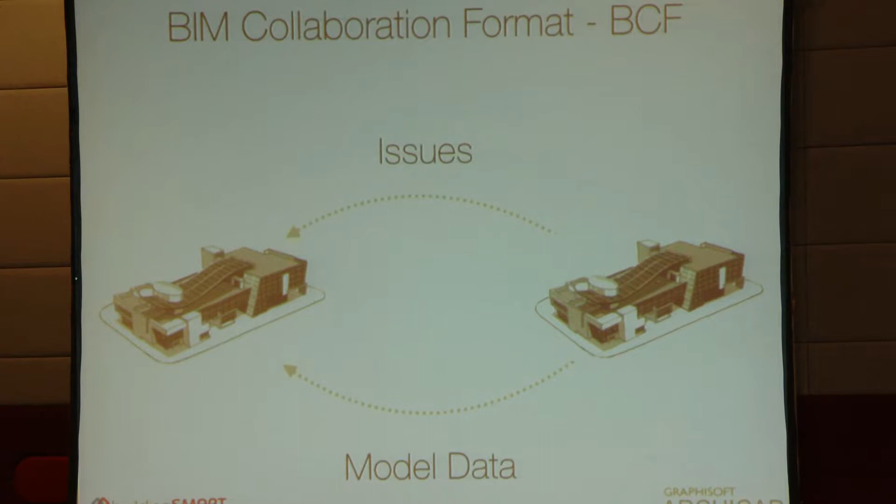So the point of this kind of communication is that the model transfer and the transfer of different issues identified in the project are separated from each other. This means we don't have to send the model information with each and every issue we've identified - we send the model only once, and we record issues one by one and send them separately.

This way, the file size of the issues can be reduced to simple kilobytes, so that the data transfer on the internet is reduced, and the XML scheme is very easy to read by any kind of software. You'll see in the end what software is compatible with BCF.

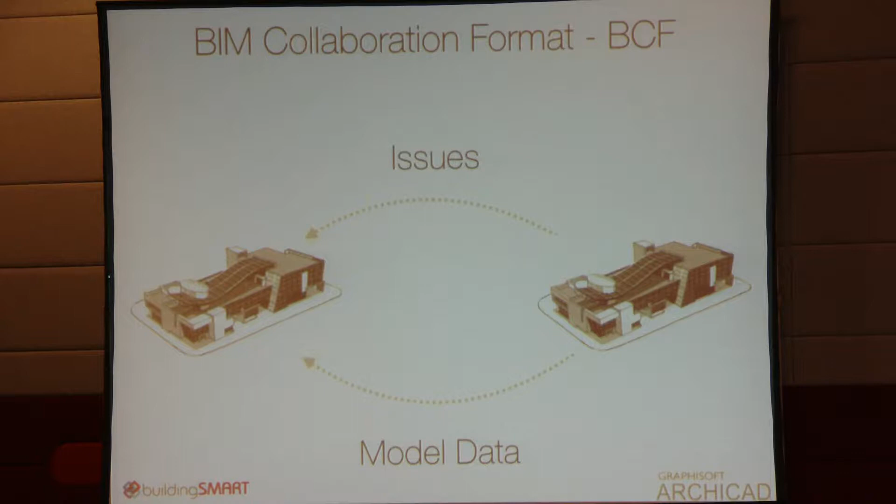So I'll show you an example. I'm going to use ArchiCAD and Tekla BIMsight to show you how we can communicate these issues with each other. First you have to identify the issue - you can do it manually by highlighting certain elements, or use some automatic process like clash detection between MEP and structural elements.

As you can see, the elements are highlighted with orange color. One of them, the horizontal one, is a structural beam right below the slab, and the other one, going from left to right, is an MEP element. So it's a collision, which was automatically identified by ArchiCAD.

Now we have an entry already. This issue contains the information about the element, the person who created this issue, and the date. It also contains the 3D cut view, which is the position of the camera and the 3D cutting planes.

What you see on the bottom right corner of the screen is actually not a screenshot. It's a 3D view that we can restore in any other BIM software which is reading the BCF file. Then we input some comments, we input the category as well, and we can save it as a BCF.

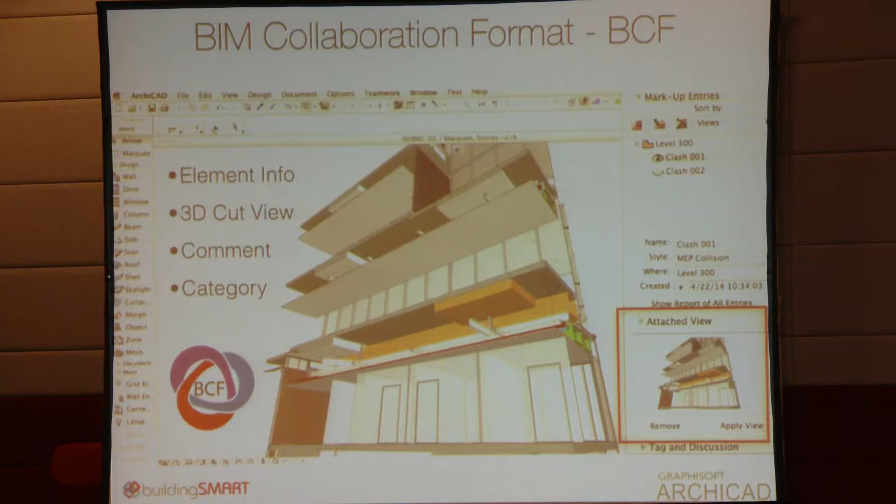The second step of the communication is transferring the model between different BIM softwares. If you're not using the same BIM software, you can use an open standard like an IFC file format. In this picture you see the main IFC file and an MEP file, both imported into Tekla BIMsight. Tekla BIMsight is free of charge, anyone can download it, so you can communicate with anyone who has access to a computer.

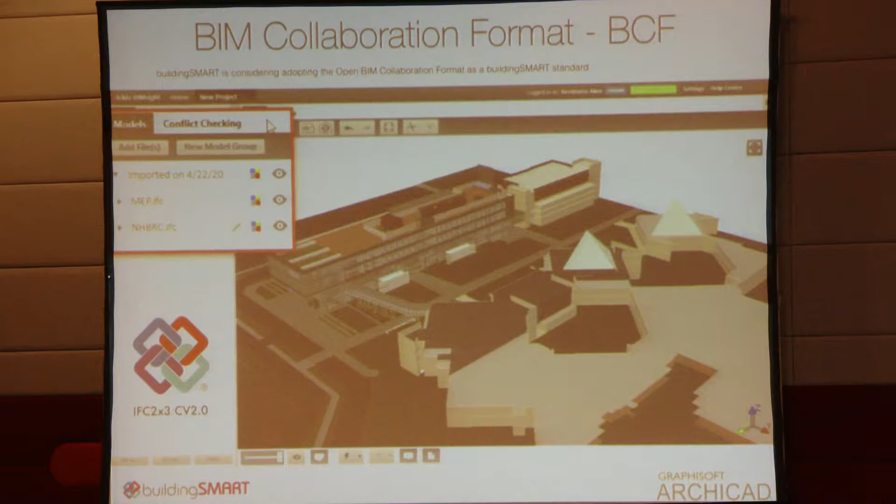When importing the BCF file, which was recorded in ArchiCAD, we can see the same kind of information. The 3D view has been restored, the 3D cut planes are there, so you can actually locate your issue in any kind of model, regardless of the size and complexity.

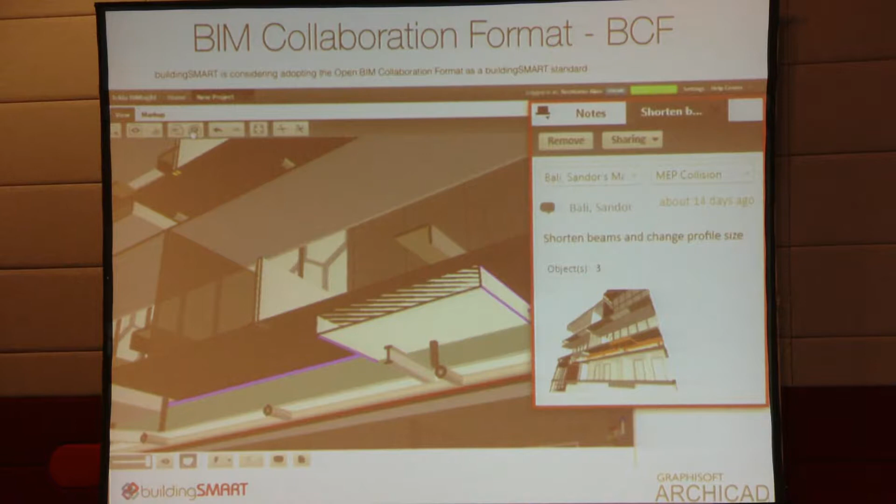You see the information there: the 3D snapshot, the 3 objects highlighted with purple lines, the name of the person who created the comment, and also the comment is there.

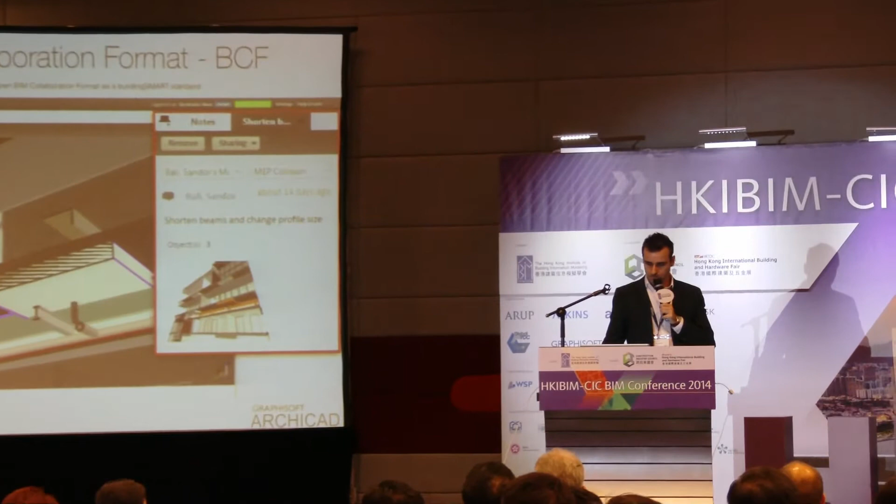So what we have to do is create our answer. It's also going to be a BCF file. We highlight the element, it's the structural beam. You can see the instructions there: shorten beams and assign a certain profile, name of the person, 3D snapshot, all included, and save it as a BCF file and send it back to the original software.

Now you can see that the same kind of 3D view was restored. 3D cut planes are cutting the model, so you can easily identify this issue within the model.

So this is a truly open standard that will hopefully transform the way we communicate issues among project stakeholders. Many of the popular BIM applications have already adopted using it. The original developers wish to transfer the ownership and rights of the BCF scheme to buildingSMART for adoption as an open standard and maintaining it for the benefit of the industry.

The second thing I'd like to talk about is collaboration. In order to understand that, and in order to understand the case studies that I'm about to show, I have to talk a few words about the technology being used. For that, I'd like to begin with the teamwork concept.

In a very short definition, teamwork is how we manipulate the model in the cloud or just on a local area network. It offers a real-time collaboration environment with prompt updates about the BIM model, so every participant can work on the latest version of the project. It's just like you're sitting next to each other, although you may be sitting in different countries.

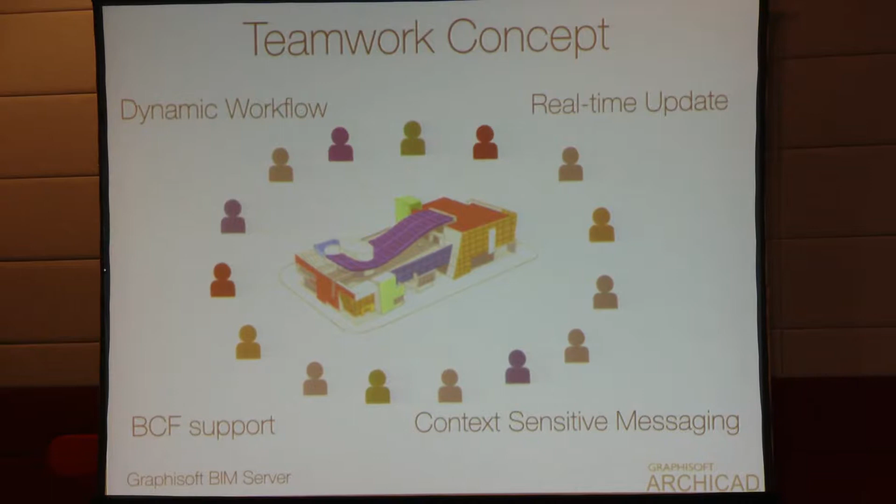It's based on a dynamic workflow where users can reserve, release, or request elements from each other. Once an element is reserved by someone, it cannot be modified by any other user until it's released or requested by someone else. This kind of workflow is supported by a context-sensitive messaging system where users can include element information and location with the request and the messages. Teamwork also supports BCF files, so it facilitates an open communication workflow with any stakeholder in the project.

Based on the real-time collaboration concept of teamwork, the Graphisoft BIM Cloud is connecting teams and projects of any size or setup using a very simple HTTP protocol, accessible from computers or even mobile devices. It can scale up to any size of project and any size of team or any number of companies.

It can comply with stringent security measures with its very flexible access management system, and it's fully integrated with the company's Active Directory user database. So you can just ask your IT manager to import all your users, and you can use the same login, the same password for accessing the BIM Cloud.

So this is not a service that is provided by Graphisoft. We just give the software package that can be used in many ways.

It consists of three main parts: the BIM Cloud Manager, which is responsible for managing the users, the projects, project location, the access rights, the libraries; the BIM Cloud servers, these are the ones that are hosting the BIM data, and when you're working on the files, this is where basically the computational task of manipulating the model is done; and the third is client access licenses.

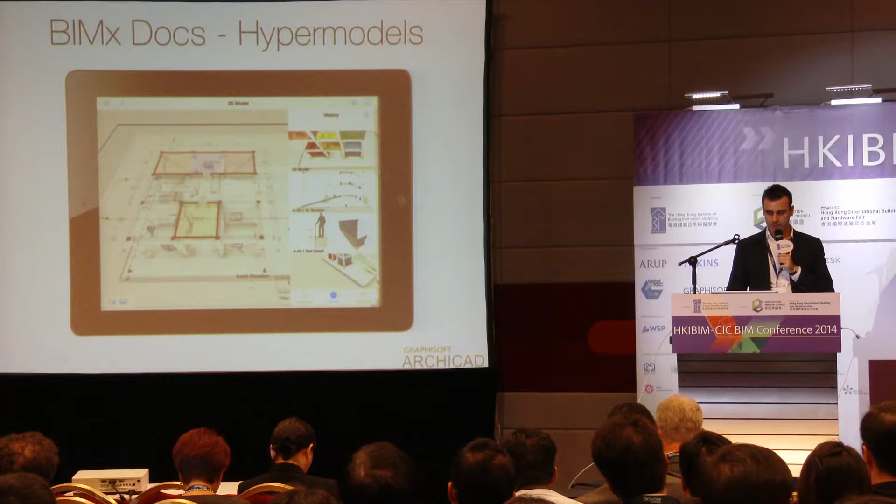You may have guessed, when I was introducing some trends about the BIM industry, that my case studies are going to come from Japan. I have two studies, one from Kajima Corporation and the other from Obayashi Corporation. These slides are presented by Kajima, so I'm going to show them as they were.

In 2013, Kajima implemented a cloud platform for collaboration to manage the expanding number of BIM projects. This was called Global BIM, and I will explain the evolution of this technology and the conclusions they have found.

Kajima started its business 170 years ago and has its headquarters in Tokyo, Japan. Now it has grown into a company of 15,000 employees worldwide with an annual turnover of $15 billion US. There are many offices all over the world.

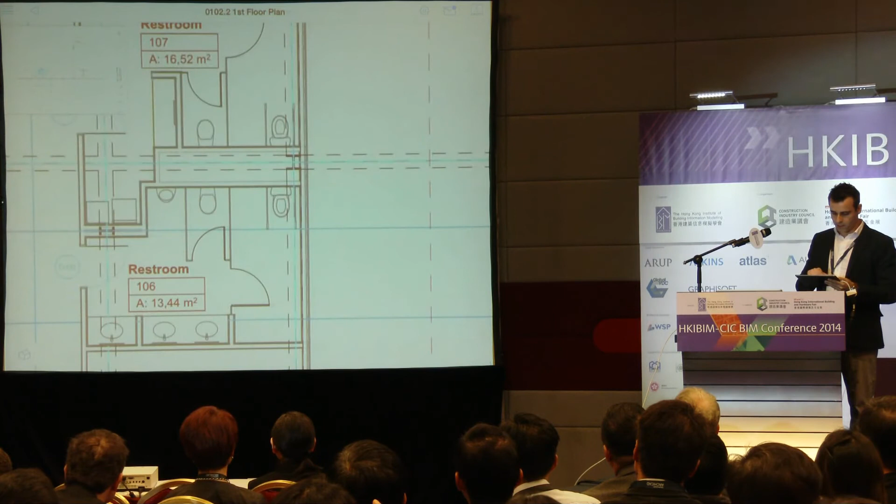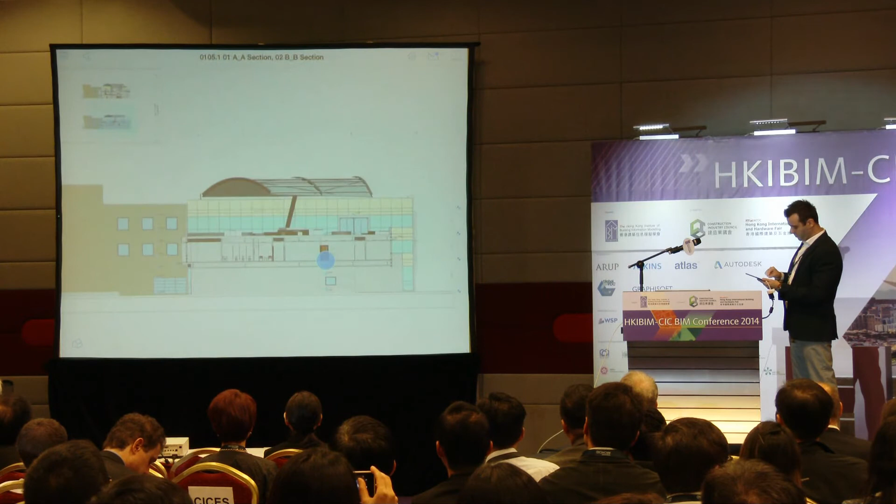And you can see that this is a very high quality drawing. These hyperlinks are all across the project. It's not very visible, but if I zoom in you may see these blue markers. For example, this is a section view. You can jump to the section view and also view it in 3D.

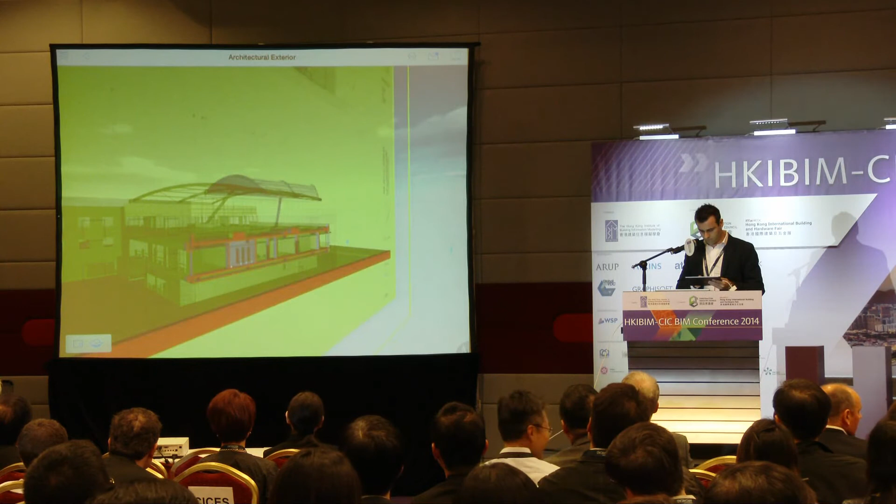So now I can move the section independently, or I can decide to move the cut plane to create new sections. So at the same time, it's a way to combine the 2D documents and the 3D model, or you can also use it as an interactive presentation tool.

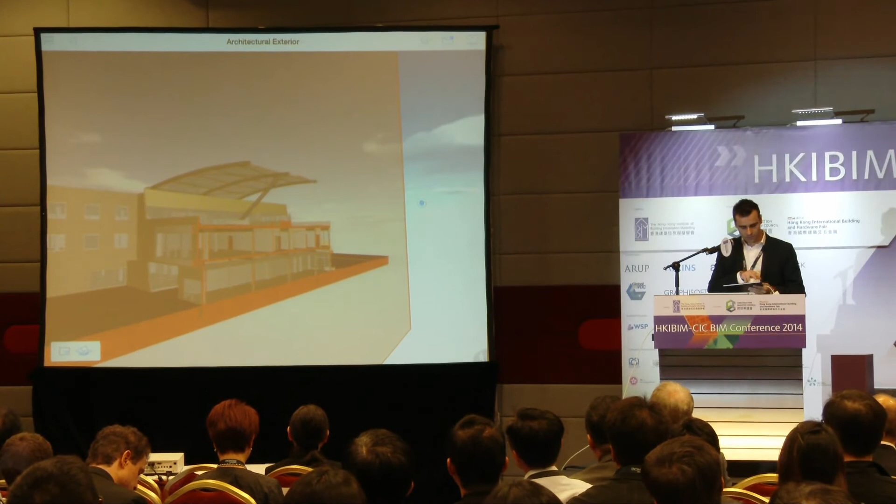Okay, now let's see some issues that I've been thinking about. I had some problems I want to solve. For example, I'm walking around in the lobby of the building, and I'd like to know some information about certain elements. Let me just walk closer to this place. I want to know the height of the stairs.

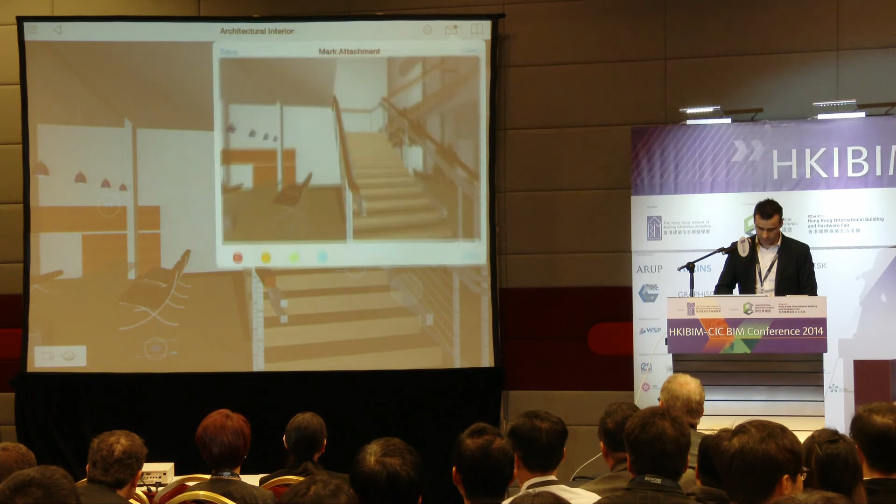So I will send a message to my colleague. You can see Marcelo is online, and even Peter from Japan. I'll add the context, which is the location in the 3D model, and I also do some highlighting, and I will ask him about the height. I'll send this message to him.

Oh, where's the Wi-Fi? That's nice. Oh yeah, my computer is off. Okay, yeah, it's really one minute if I can set up the Wi-Fi again. Yep.

Okay, hopefully we will be joining back into the project. So to give you an idea about the background of what's happening, we are both joined to the same BIMcloud project. Marcelo, my colleague, is joined from an ArchiCAD in Singapore, and I'm using this iPad here at the conference.

It's typical, Singapore lets us down every time. We've never tested it like this before, so let's hope we can get back online. Let me show you... no network.

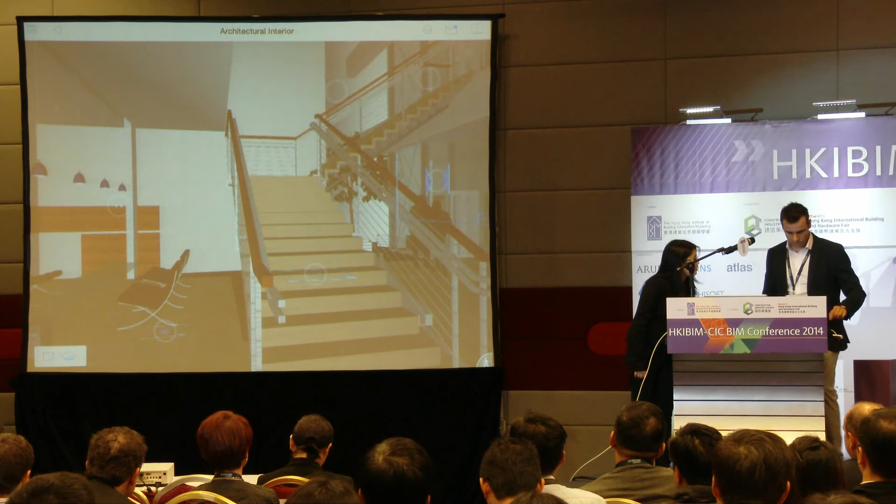No, I think, Peter, in the interest of time, we're going to have to cut you off, I'm afraid. We believe you that it works. Have you got him? Well, I think if I send it now, around one minute, the answer will arrive.

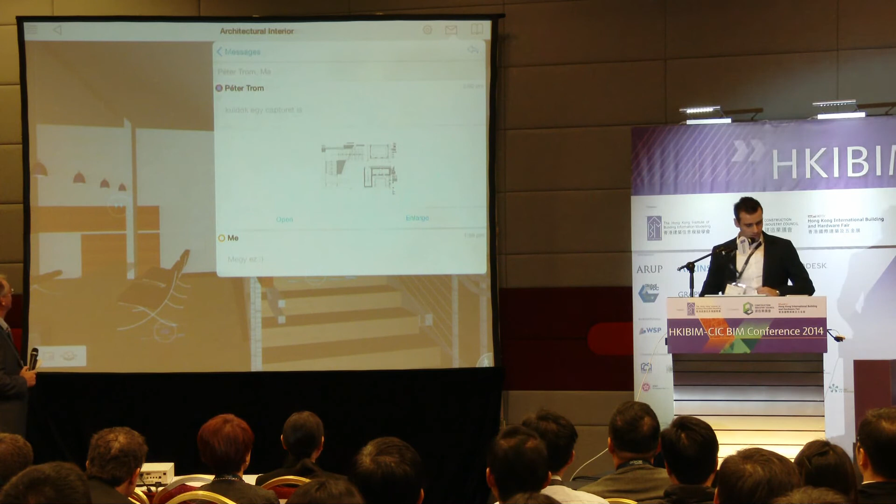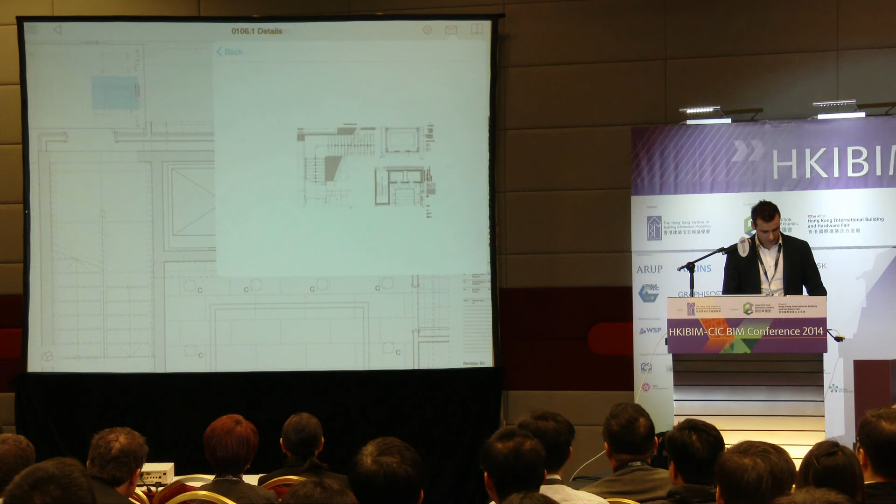Or I wanted to show is that, for example, it's an existing message I get from my colleague from Japan. If I click on the open view, you could see that from the 3D, I was actually moved to the 2D context, because this is the view he was attached to. You can see the message in Hungarian and also the screenshot that has been attached to it. So yeah, no answer so far.

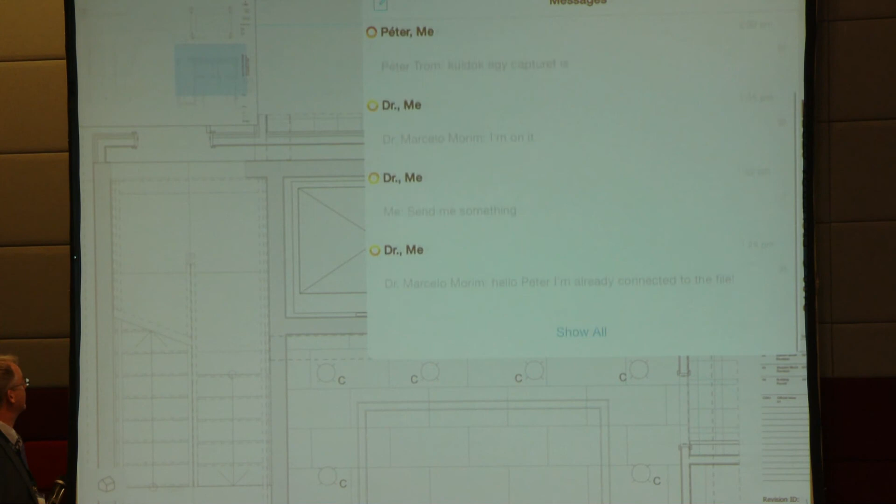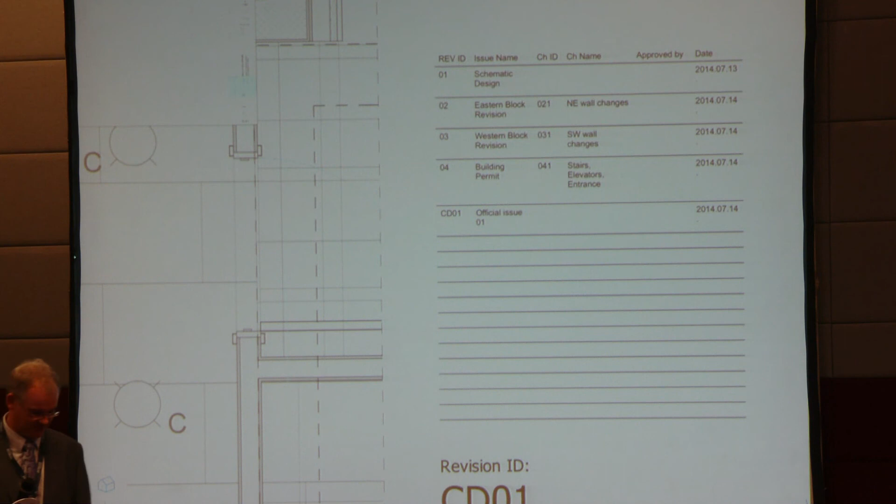So the point is that we're not sending screenshots to each other. We are sending the locations, our location within the project. So if it's a 3D location, we're going to jump there in the 3D space, or if it's a 2D location, then we're going to jump there. For example, here, this is all included in the messages. So you can just take your iPad to the construction site - you got drawings, you got model, you got live chat with your colleagues.